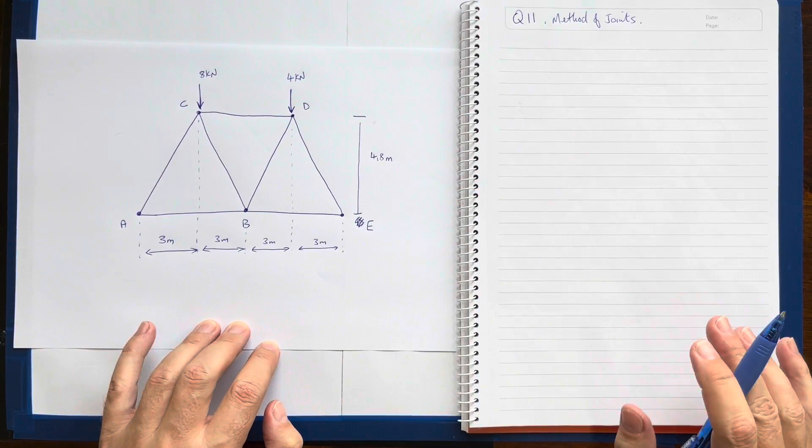So we have a question that is saying find the supports, the reactions of the supports of A and E, and also to solve for the forces in each of the members of the entire truss, using method of joints. This might seem like a very big question to you, but it is not that hard. All we're going to do is isolate each joint by itself as we go through it to solve the forces in each of the members.

But firstly, before we start, we notice that we have this truss with the triangle shapes, but there is no angle on any of the edges here. And if we look at the distances - 3, 3, 3, and 3 - and that particular distance from there to there, the height from B up to the member CD, what we can see is that angle will equal that angle, will equal that angle, will equal that angle, just by the shape of this particular truss.

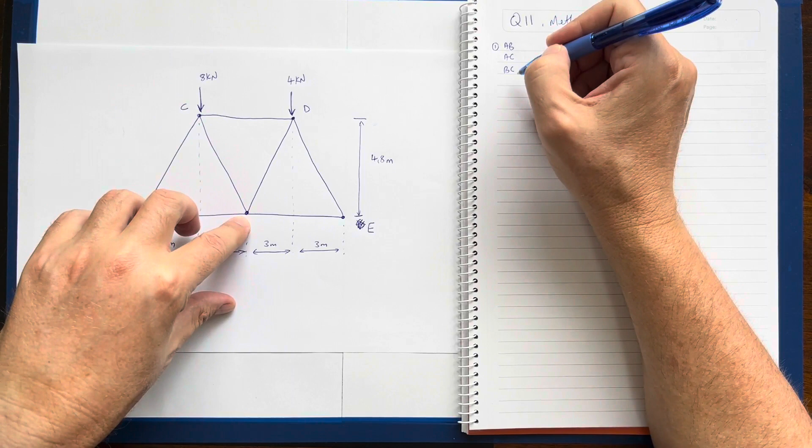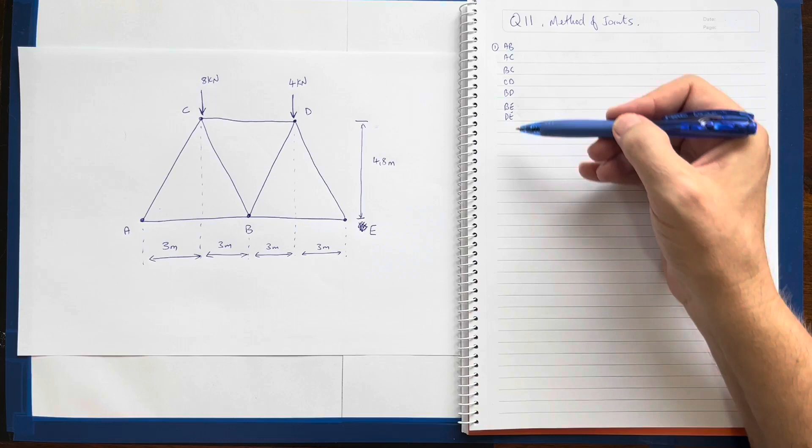So the first thing I would do is identify what particular members do I need to solve their forces for. So starting on the left, I need to solve what AB is. Then probably AC, BC as well, CD, BD, BE, and in the end DE. So those are all of the members' forces that I need to find.

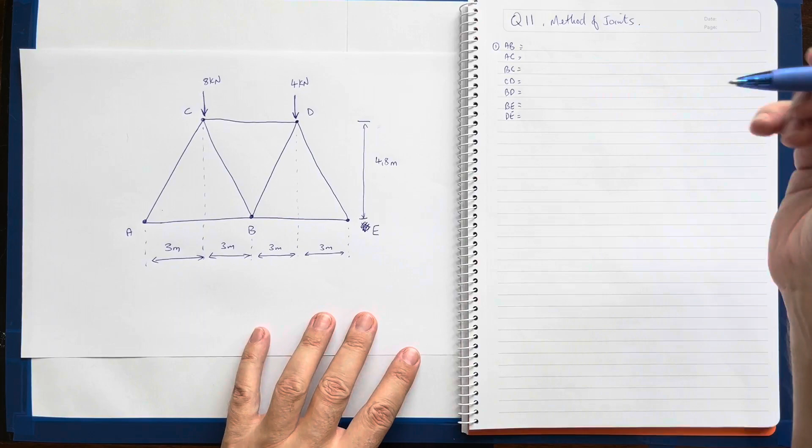Okay, what I also want to do, and as the first thing I do in most of mine, is redraw this so that I can draw all over it and go a little bit crazy. So let me draw it like that. It's going to be really quick and rough. If you're doing an exam or something similar that has something like this, literally draw it like that. So what you do is you then try and work out what it is - it helps you get a good gist of what's happening in the question.

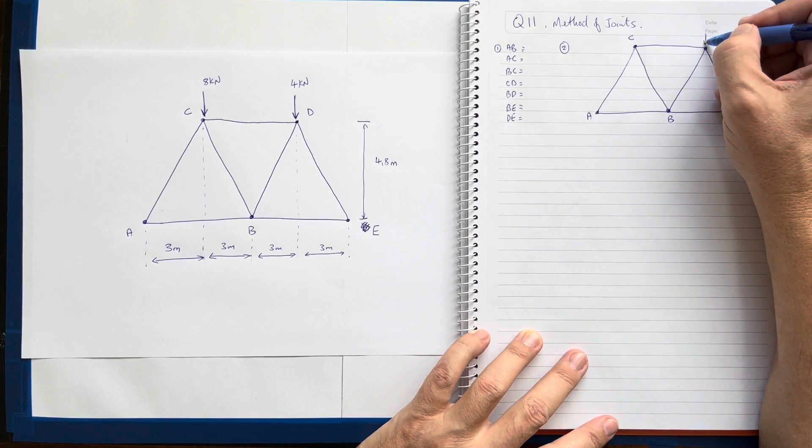There's a force, 4 kilonewtons, 8 kilonewtons. I've got a distance, 4.8, and three meters, 3 meters, 3 meters, 3 meters.

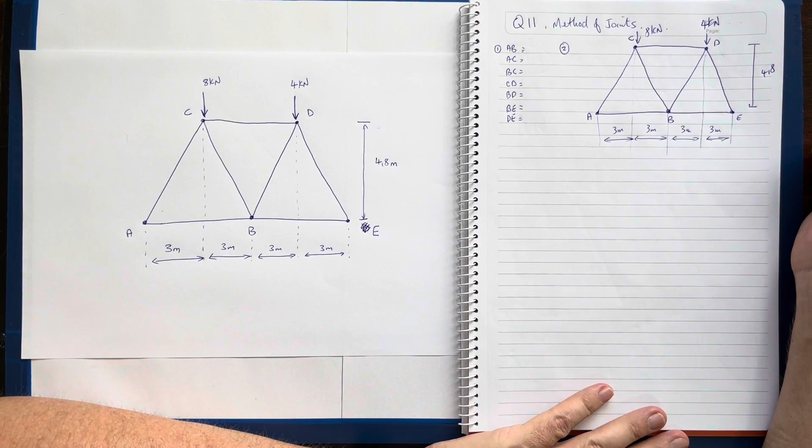There we go. Okay, so now first thing first, I need to understand what the angle is over there, and by the looks of it over there, which is going to be the equivalent there and there. Let me look carefully - I have that distance and I have that distance.

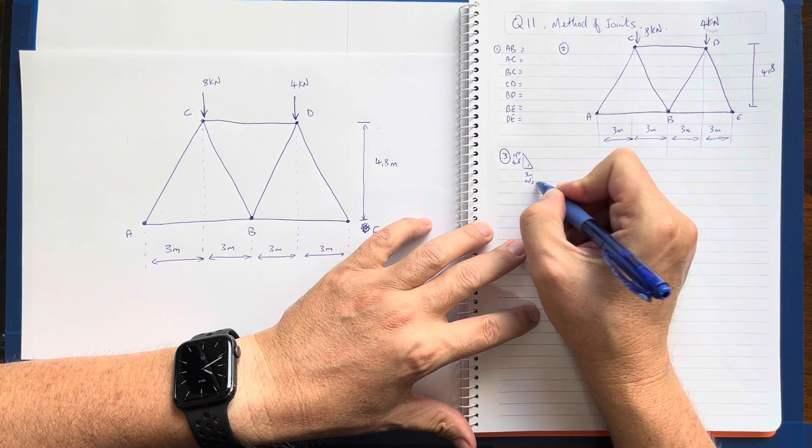I have, if I want to solve that angle there, I'll do this quickly like this. I hope you can see that: 3 meters, 4.8. I want to solve that - I have the opposite and I have the adjacent. So opposite over adjacent is tan theta.

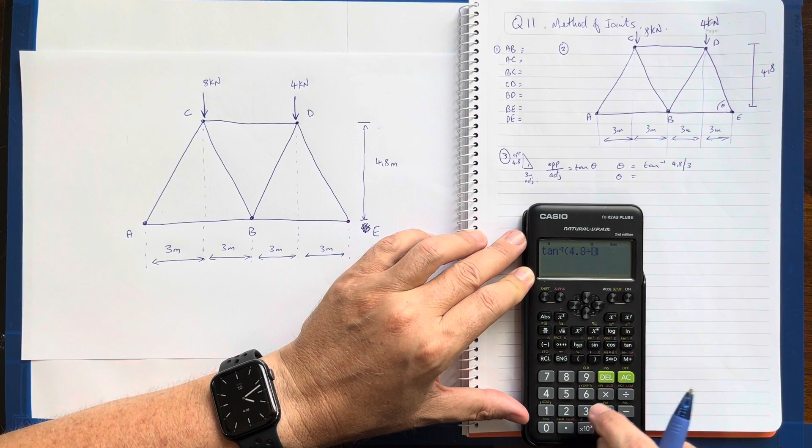If I want to find out what theta is, theta will effectively be tan minus 1. What is the opposite? The opposite is 4.8 divided by 3. Very quickly, I can solve that and go shift, tan minus 1, 4.8 divided by 3 - 57.99. I'm going to round that up to be 58 degrees.

58 degrees. Based on that distance and that length, I would straight away say that is also 58. I'd say that is 58, and that is 58 degrees. If I want, I can work out what those are, but I'm not too worried about that right now.

First things first, the question asked me to find the reactions at the supports A and E. Just like I did in the previous question, I think it was question 8, I look at the bottom. Effectively what we have is we have a beam that looks like this, and three.

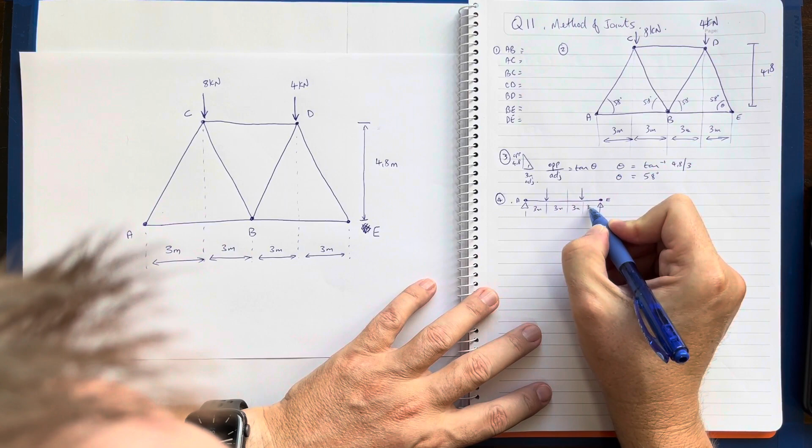That bottom set of members really acts like a beam with forces of 8 kilonewtons and 4 kilonewtons pressing down. I've got 8 and 4, and I'm just going to call it 8 and 4 now since all the units are the same, kilonewtons. Therefore, any other force I work out across this truss is going to be in kilonewtons.

So if I quickly take moments around A, the sum of my moments will equal 0. As you know, the sum of my moments counterclockwise will equal the sum of my moments clockwise.

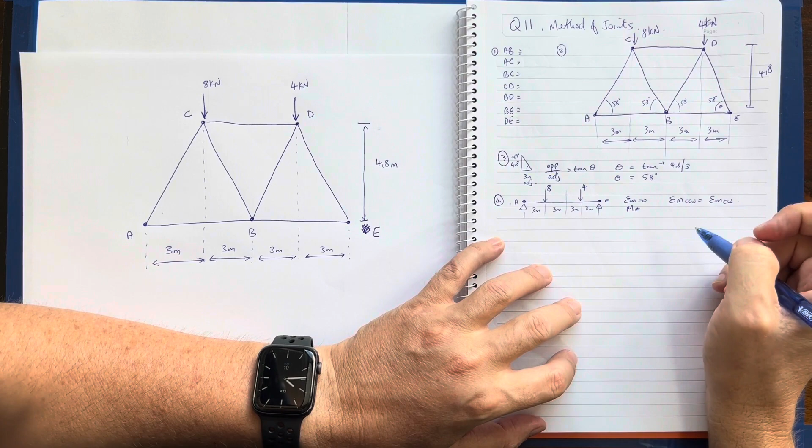Quickly resolving that into a set of formulas, let me have a look. 8 from A, what's going to make my beam pivot clockwise or counterclockwise? I've got clockwise on this side and counterclockwise on this side. The only force that's going to make it go counterclockwise is going to be the force at E.

So my external force at E times 3, 6, 9, and 12. And what's going to make my beam pivot clockwise is force times distance, force times 3. So it's going to be 8 times 3, and my force downwards, 3, 6, 9.

There we go. Without doing all the hundreds of steps I would normally do, I'm going to go 8 times 3, close brackets, plus 4 times 9, divided by 12, equals 5. So the force at my support E upwards is 5 kilonewtons.

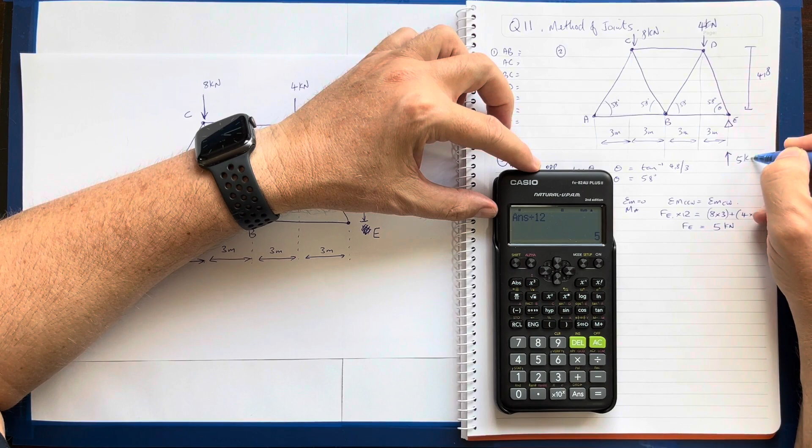I'm going to assume it's upwards because it is still positive. The next thing I can do is work out what the force is at A, and I can do that simply: sum of the forces vertical equals 0.

Sum of the forces down equals sum of the forces up. Pretty much defining my calculation, my standard formula is already there.

If I look carefully, all the forces down are going to be 8 and 4, so that's 8 plus 4 equals all forces up. I'm going to assume A is positive: force at A plus 5.

And really, that's going to be 8 plus 4 equals 12. Bring that over to this side, minus 5 is 7. Our force at A is 7 kilonewtons.

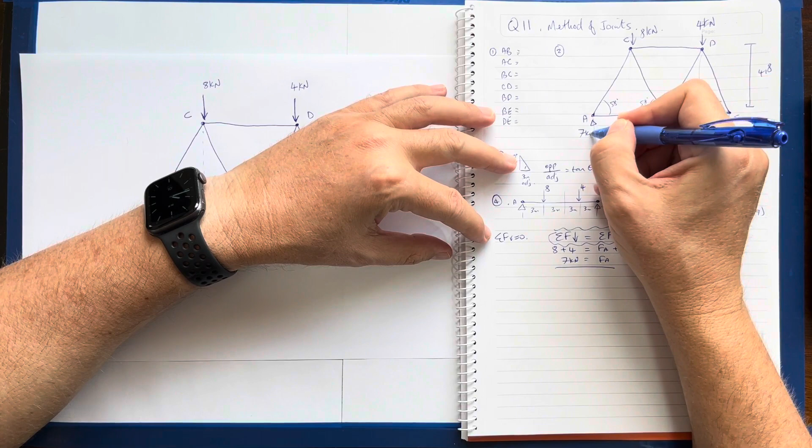So pretty much solved the reactions at my supports there and there. That's the force at those supports, supporting the load of this truss.

Now this is where I start my method of joints. I'm going to try to solve the force in each of these members and find the force at each of the joints individually, using the external forces to then work out the internal forces and their direction in each of the members. I'm going to start off quickly with joint A.

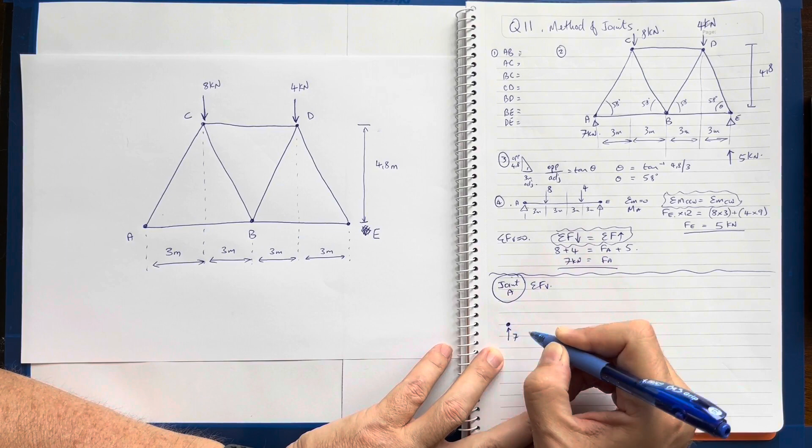What I do is I isolate joint A, and I stop and think about joint A. I'm going to start with the sum of the forces vertical at joint A. What do I know? I know that going into joint A is 7 kilonewtons, my external force applied to that joint.

I want to solve for the angled member there. It's an axial load, but if I'm doing vertical, I can only work with forces that are fully vertical, so there has to be a vertical force there. Because I don't know what it is, I'm going to assume the AC vertical force is unknown, and that it is in tension, moving away from the joint. If I do forces vertical, my forces down equal my forces up.

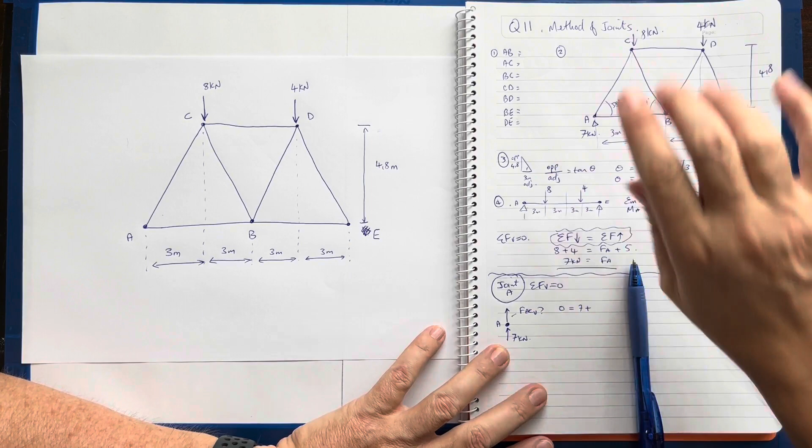Both of my forces applied to this - I don't look at the horizontal, I only look at the vertical forces there. So my forces downwards, I have none. Forces upwards, I have 7. And this vertical force, force AC vertical, I'm going to draw it here quickly.

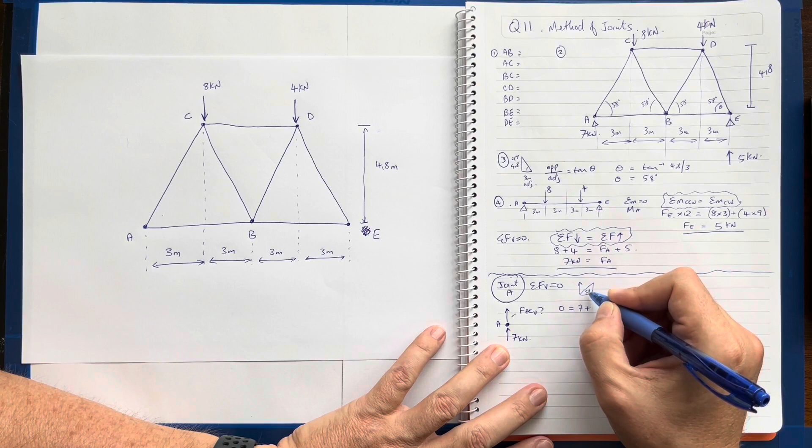If this is 58 degrees, it is the opposite. Force AC sine 58 degrees. I bring the 7 over to this side, it becomes -7 divided by sine, so I'm just going to go 7 divided by sine 58.

So my answer is -8.25 kilonewtons equals force AC. Did you see how I did that? I took the 7, took it to the other side, it became -7. On this side it was force AC, which is the hypotenuse, sine 58. I divided by sine 58 and it gave me that answer.

It is in compression, therefore it is negative. Technically, force AC is 8.25 compression. What I do is I go up to here and write AC is 8.25 compression. I've now solved the vertical of joint A, and inadvertently I've also solved the force in member AC.

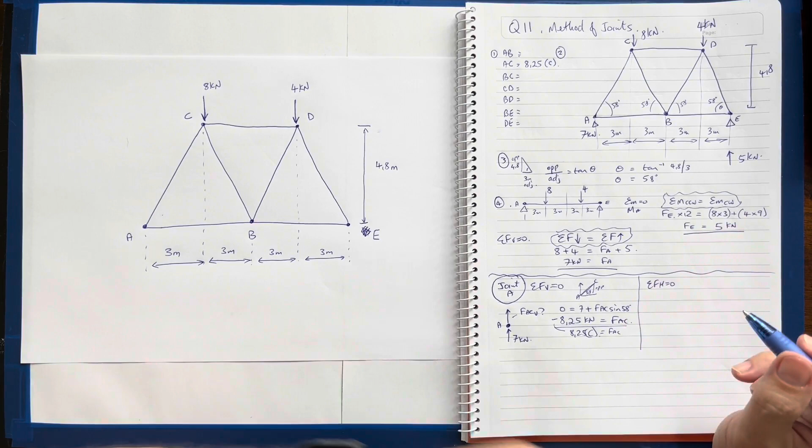Now at joint A, I'm going to do the sum of the forces horizontal equal to 0. What I do now is look at all the forces that are horizontal. If I look at my triangle, I know what AC is. It's no longer going away, it's not in tension, it's compression. So at that joint, it's actually going in this direction, into the joint. It's being compressed, so internally it is pushing outwards.

If externally that member is being compressed, the internal force pushes towards the node. Therefore if I try to resolve my vertical, it's going down, and the resultant AC is going into the node. My horizontal force is also going into the node, which is in compression. So what do I know at that joint horizontally? That my force AC horizontal is going into that joint at A, 8.25, so it's 8.25.

Let me ignore what I just said there. It's going to be going in- force AC is my horizontal force, because here's my angle being 58 degrees, this is my adjacent. My adjacent is going to be my hypotenuse cos 58.

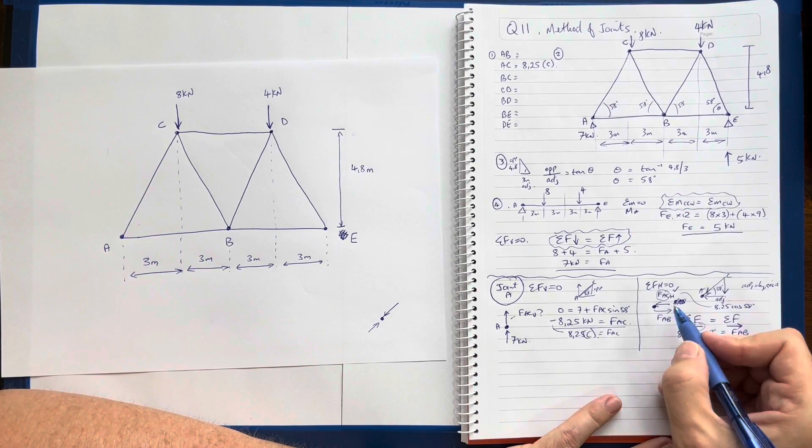I've already said to the left, so going that way is 8.25 force cos 58 degrees, and the force of AB that I don't actually know what it is, so I've assumed it's tension and away from the node. This is, I can only use forces that are going in horizontal: 8.25 cos 58, equals 4.37 kilonewtons force AB. It is positive, and because it's positive, positive is tension.

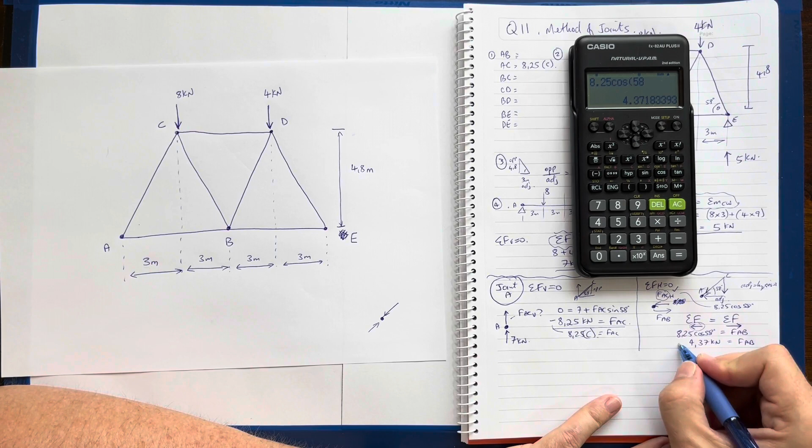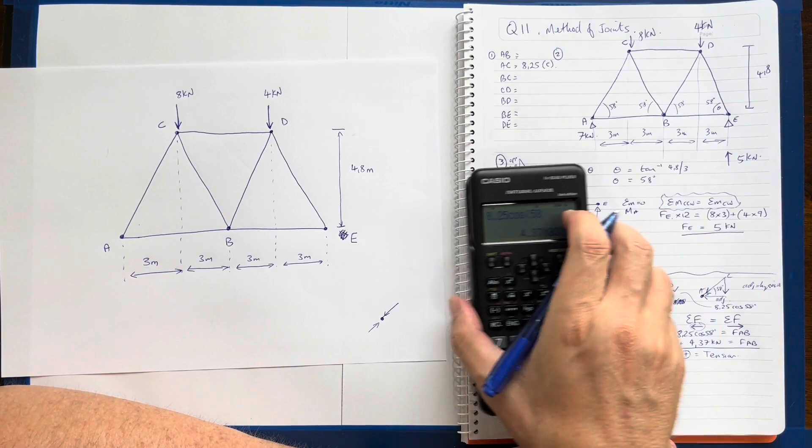So straight away there, I've solved A, this one and this one. 4.37, tension.

Often these types of questions will ask you to draw a force diagram when you're finished. I'm going to draw that over here so I don't have to create the whole thing again. Technically I resolved that AC is in compression, meaning at this joint the forces are traveling towards the node, and on the other side also towards the joint, at 8.25 compression based on the arrows. I've just solved AB - it's in tension, moving away from the joint, at 4.37 kilonewtons.

What's the next one I'm going to go? Well, I've now solved those two. I've got a force going vertically there, a force that's horizontal, and a force that is at an angle, so it has to be resolved into both vertical and horizontal. But I can only work with horizontal forces together, and vertical with vertical. AC can be resolved into a vertical force, and CB can be resolved into a vertical force, so I can solve for CB because I have the external force, the internal force, and can solve for its equivalent. So let's work that out - let's go to joint C.

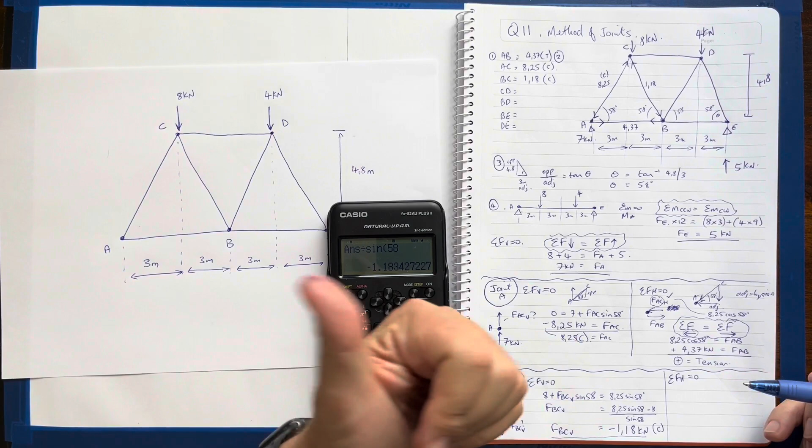Now that I've solved the vertical, that's pretty much easy. I can do the same when it comes to horizontal. I'm squishing it right into the corner here by the looks of it. The sum of the forces horizontal - let me find my little formula. Whatever's going left, whatever force is applying left, should equal the sum of the forces going to the right. That's being in complete equilibrium. Let me draw that node as well.

So what do we know about C load? At this particular node, what do I have? I have the horizontal equivalent of AC going towards the node, so force AC horizontal - I can solve that easily because I know what AC is. I don't know what CD is, so I'll make it go away from the load again: force CD is a question mark. I also have an angled load there, which is BC, and I know what it is. It's going into the load, but its equivalent will be traveling in that direction, so going into the node would be force BC horizontal.

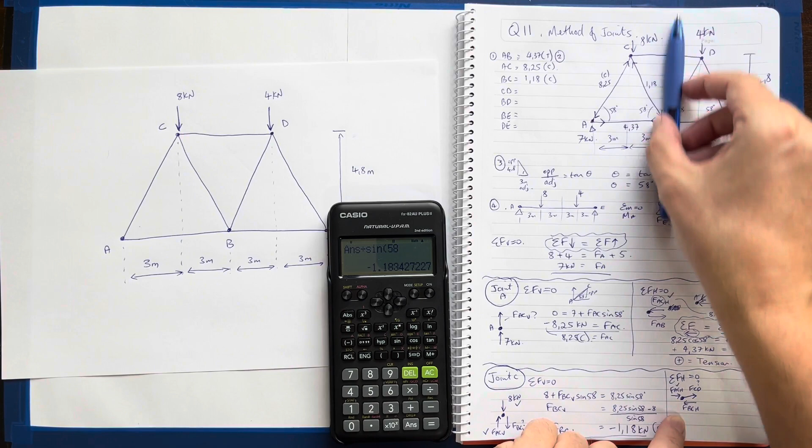Force AC horizontal is going that direction. Force CD, because I don't know what it is, is in tension, going away from the node in that direction. Then force BC going into the node that way - but technically its horizontal will be traveling forward and its vertical will be traveling up and into the node, so the resultant there is going in that direction. Let me solve that then.

So all my forces to the left is force BC cos 58, equals all the forces to the right, which is force AC cos 58 plus force CD, which I don't know what that is. We know that BC is 1.18, and we know that AC is 8.25. Technically, what happens now is...

1.18 cos 58 - that's on this side of the equation. I don't want this, I want it to go to the other side. Let's close the brackets: subtract 8.25 cos 58. FCD equals negative 3.75 kilonewtons. It's negative, therefore it's compression.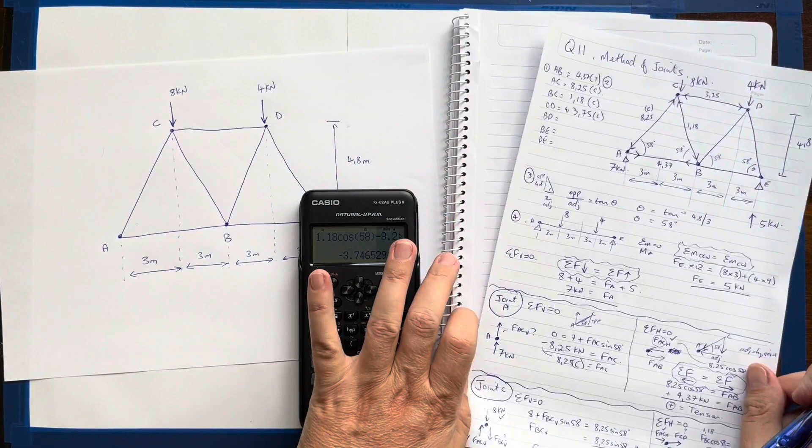This is quite a long question. We can probably do it on 1.5 times or 1.75 times speed to get across it all.

Now, the next one I can do is BD. So I can go to joint B. Let me go to joint B.

After a while, when you do these quickly, it will become like second nature. You'll be able to look at this very quickly, look at each joint, say, what's my resolved force of the angled member there? What's the vertical equivalent? What's the horizontal equivalent? And we'll go straight into it. It becomes a lot easier.

So the first thing I'm going to do is look at joint B now, and go sum of the forces vertical equals 0. Really, up equals down. But let's have a look at the joint. What do I have at this joint?

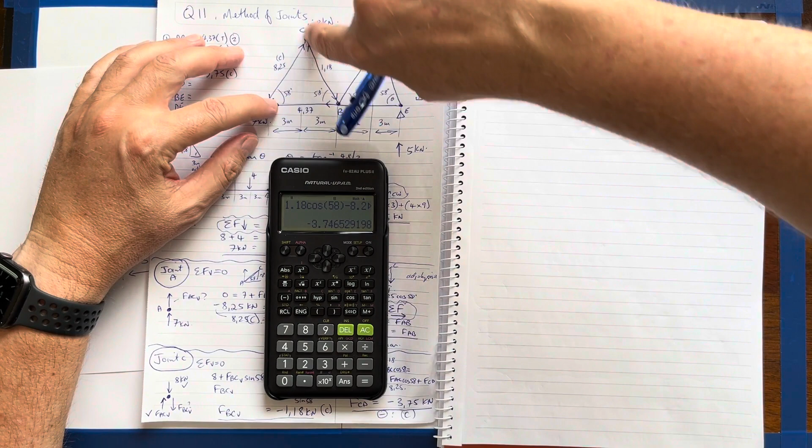At B, I'm going to ignore the horizontal ones, because I can only look at vertical ones, and it's only that, and then it's only going to be BC and BD. I actually need to solve what BD is, and I know what that is, so I can solve that really easy.

So vertically, if I ignore everything else around here, including the bottom trusses because they're in perfect horizontal, what I'm going to do is look at force BC vertical. I know it's going into the node because it's in compression, and I can solve that because I know what BC is.

I don't know what BD is, so it's going to be going up. I'm going to assume, because I don't know what it is, that it's tension, so it's going to be positive going away from the node, and technically it's going to be away from the node. So up equals down, and this is going to be force BD vertical, and this way I can actually solve for that.

Vertical is going to be sine, they're all going to be 58 degrees, so that's going to be pretty easy to solve. So technically what I can do is go sum of the forces downwards, which is, what is BC? BC times 1.18 sine 58, that's my vertical force, it's going down.

Equals, what's my force upwards? Because I'm going away from the node, I'm going to assume it's going away, I'm going to assume it's in tension. I don't know what it is, it'll solve itself. Force BD, also sine 58.

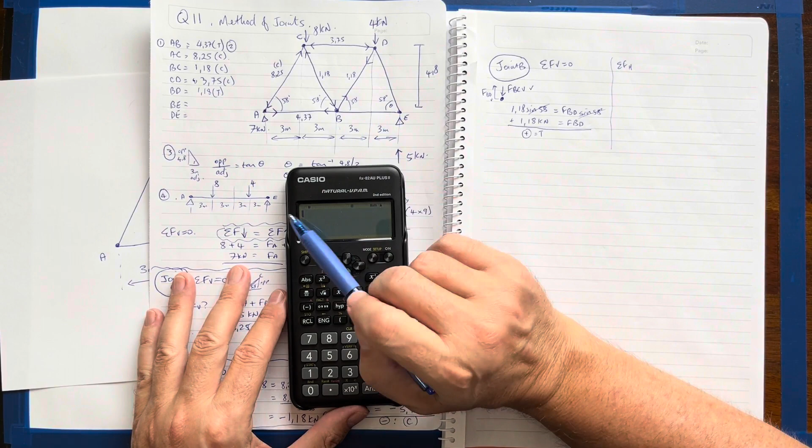Let's have a look at the sum of my forces horizontal, because now I can solve for BE if I want to as well. This might get a bit tricky because now I have a horizontal force there. I have the equivalent horizontal force in BC. I have a resolved force of BD now as well, because there's an angled load onto it, it's going to be a force in, and then there's going to be 4 different forces.

Let me solve this quickly. I'll do this here and maybe do the calculations down there. So here's the node, here's B. So what do I have?

BC is in compression, therefore the force is going into the node, and my horizontal is really going to be going into the node then as well. So force BC horizontal. I also have force AB, but it's going away from the node.

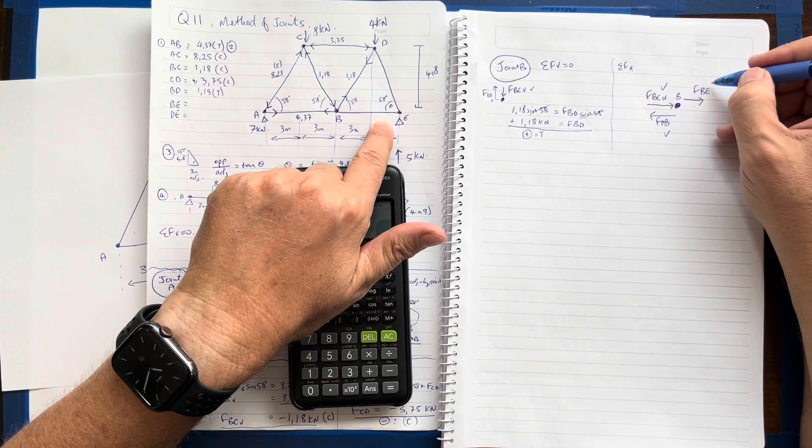And that is force BD, horizontal. AB is horizontal and BD too. So there's 1, 2, 3 forces going in that direction equal to a force going in the other direction. So I'll just go and solve it here.

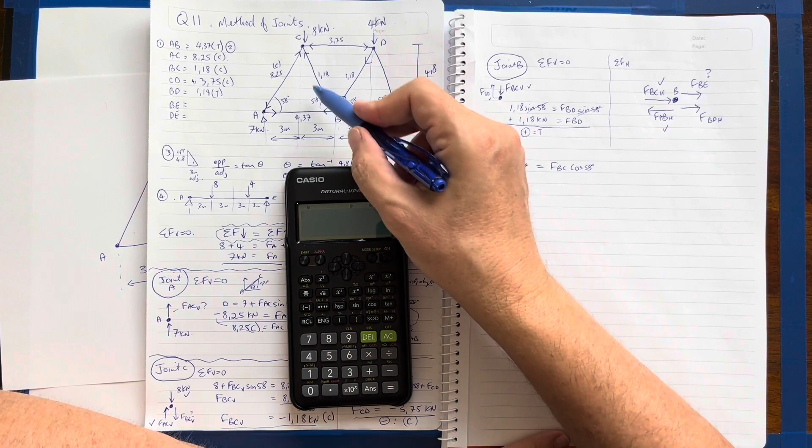Force AB is automatically horizontal, going in that direction, equals force BC horizontal, so it's cos 58 degrees, going in that way, plus FBE, I don't know what that is, but it is traveling in that direction, away from the node, because I've assumed it's in tension. I have no idea what it is, so I assume it's going away. And FBD, and that's going to be cos 58 degrees.

And there we go. Let me just put the numbers in now, so it'll be easier for you to understand. 4.37 equals FBC 1.18 cos 58 plus FBE plus BD 1.18 cos 58. That's two of them.

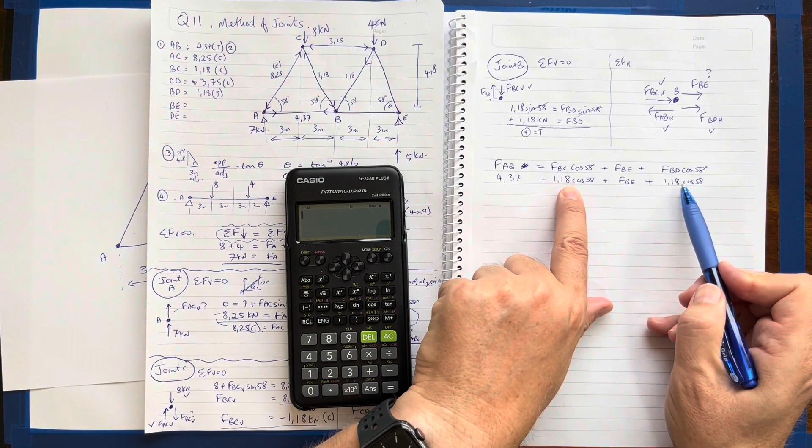Interestingly, in order to solve that, I'll take both of those to this side and they'll become negative. So really, and you'll see in my calculator here, 4.37, that will go to this side, so I'm going to subtract, open brackets, 1.18 cos 58, close brackets, minus again, let me do two of those, minus 1.18 cos 58, close brackets, positive, oh wow.

Did I solve that correctly, or did I make a mistake there? Let me double check that. 4.37. Okay, 4.37, subtract 1.18 cos 58, and that goes over as well. Subtract 1.18 because BD is the same.

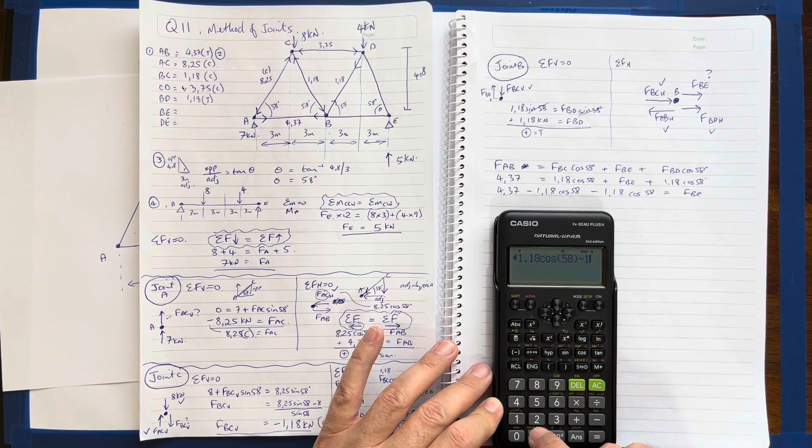Cos 58 equals FBE. 4.37 minus open brackets 1.18 cos 58, close brackets, minus 1.18 cos 58. I thought something seemed a bit odd there. It wouldn't be exactly the same. FBE is...

3.12 kilonewtons and it's positive, so therefore it's in tension. BE is in tension, so it's moving away and away, and it is 3.12 kilonewtons in tension.

And then I'm really just down to my last one, which is I can go up to there and solve it, but there's so many different forces. That one, I can double check it if I want to, or I can just go straight to this one. I know that's 5 kilonewtons. I know what that is, and that is 3.12 kilonewtons. So I'll just go to joint E because it's going to be simpler.

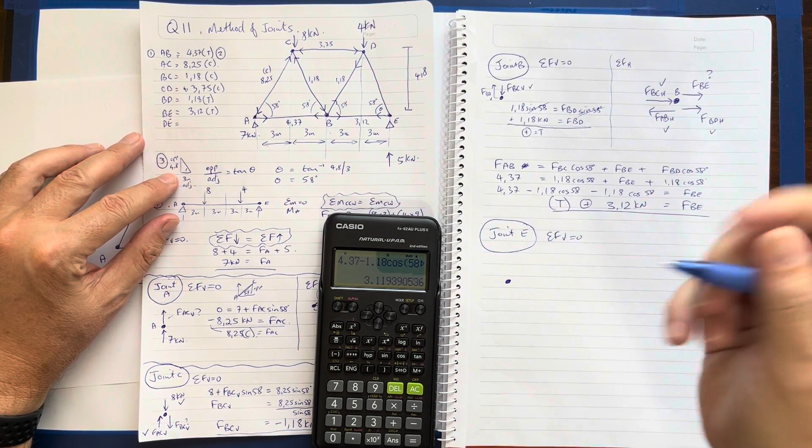Joint E, sum of my forces vertical. I'll do the vertical because it's easier. This is going to be 5 kilonewtons, my external force is 5. And my equivalent is actually going to be, I don't know what that is yet. But I know my horizontal, it's going to be the equivalent. So this, I don't know what the vertical is going to be. So my FDE vertical is all I can really solve.

And because this is going to be the height is what I want, my angle is 58, I actually want the vertical. So they're both going in the same direction. Forces up equals forces down. So forces down is 0, forces up is going to be 5 plus FDE sine 58. It's going to become negative 5 divided by sine 58 equals FDE.

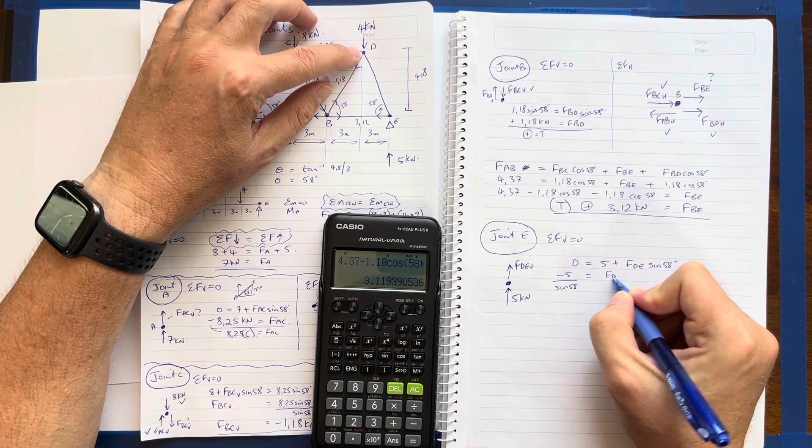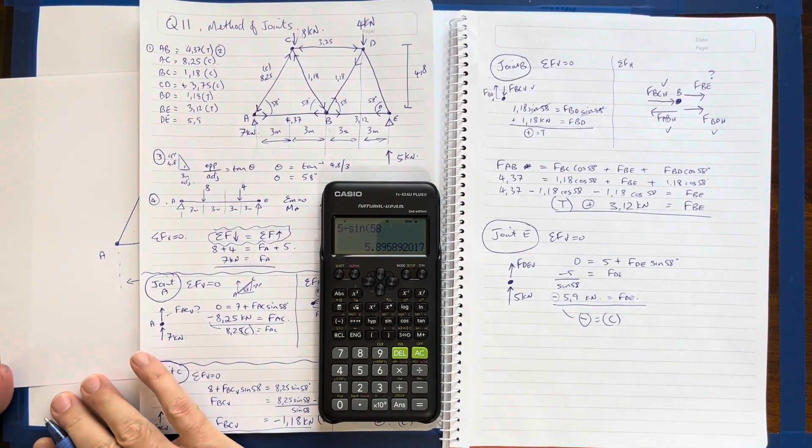5 divided by sine 58. I know it's negative 5.9 kilonewtons negative, don't forget that. And it's negative, therefore negative equals compression. I'll write that here. 5.9, sorry, I'll move my whole table. 5.9 kilonewtons in compression.

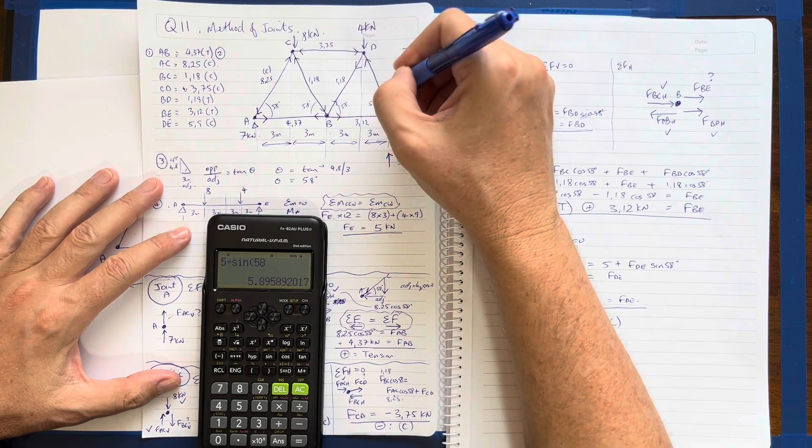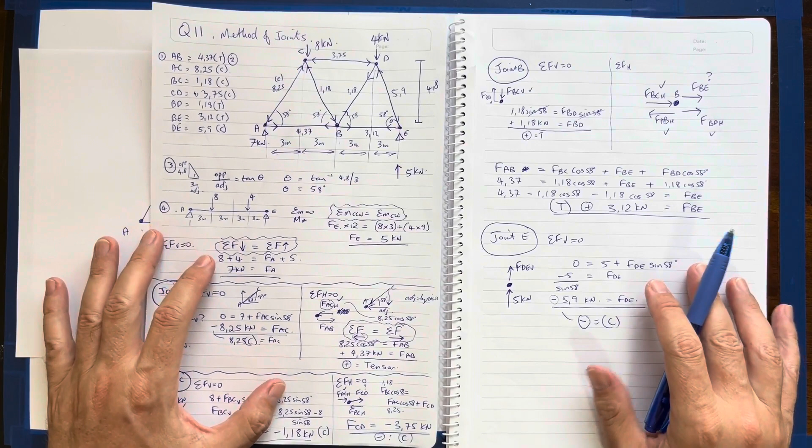And to finalize that compression towards the joint, 5.9, and there is my answer. And I actually have a printout. I checked on the Valdivia truss simulator as well as the JHU truss simulator, and I verified that all of these are exactly the same as the answers there. Very long way to do this question.

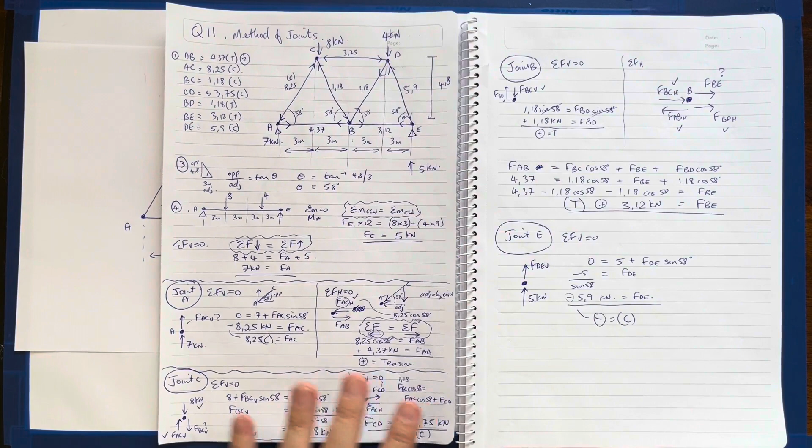I apologize for it taking so long, but it really gives you the practice on looking at each of the nodes vertically and horizontally, and I've solved the force and direction of every internal force on each member. And that's the method of joints for you. I hope that helps.